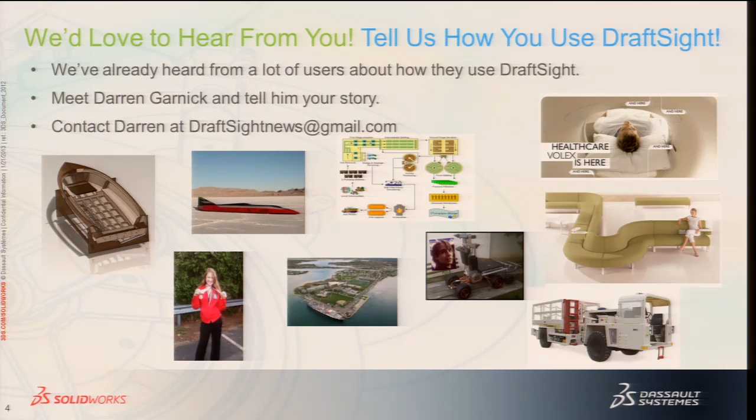We have a lot of great stories, and we like to keep them coming. Darren is here at SolidWorks World. If you feel like you want to go talk to him, he'll be in this session towards the end. When he walks in, I'll just kind of say, hey, that's Darren, and feel free to go up to him. Otherwise, he has an email address, draftsitenews@gmail.com. You can just send him an email and say, hey, look at what we just did with DraftSight. We've got some great stories already, but we'd love to get some more.

So today's agenda, I'm just going to go through some demonstrating with DraftSight. Hopefully you'll get some feel for what you can do with this system, what you can do with this product. I'll demonstrate these things, and I call them productivity boosters. So if you're using CAD and you want to customize your user environment, I'll show you how to do some of that.

Give you some of the things we've got going on with the toolbox. We've got this new add-in that we're going to offer. And I guess I'm free to say this now - it's not part of my presentation, but if you don't know, DraftSight, there's a free version of DraftSight.

You just go to draftsight.com. You can get it downloaded for free. It's available for the Mac, Linux, and also in Windows 64-bit and 32-bit. Just go download it for free.

We also have what we call the premium version. And the premium version is a paid-for version of DraftSight. With that, you get our telephone support, so you can call and get support. You get a network license, and you also get the use of DraftSight APIs, and you can run Lisp with DraftSight.

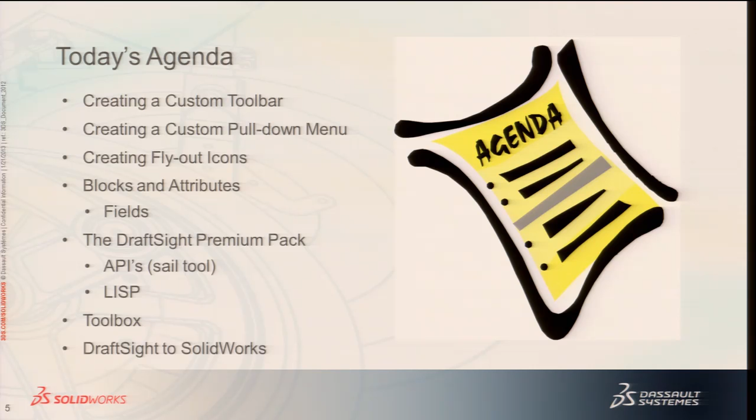Okay, let me just see if there's anything else on this slideshow. Be a CAD hero, we have a link here. Suzanne, this still works, right? We have a link here if you want to go back to your office.

Part of the reason why we offer this DraftSight is to try to get you to save some money on your CAD budget. If you use another CAD product, 2D CAD, DraftSight is DWG DXF native format. And if you're using 2D CAD in your office now and you're paying a premium price for that product, DraftSight is a good solution.

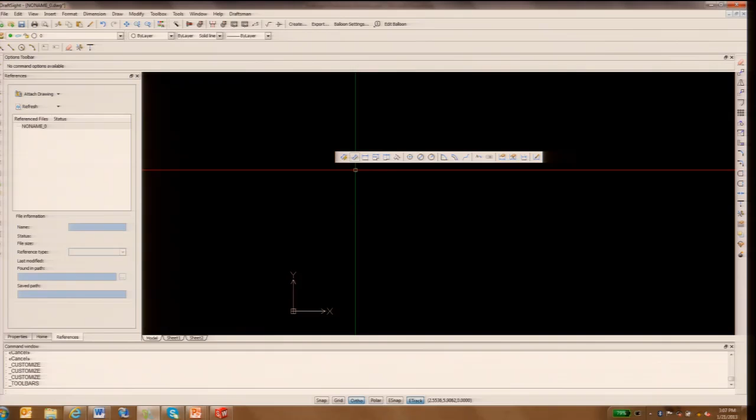Then I just go up to toolbars, and I look for the one that said draftsman. I click on OK, and where'd it go? It's right here. To dock a toolbar, you just grab it until you see the blue shaded area and just let go, and it snaps it in place. And then it snaps in place.

So I will get to that question real quick because it's pretty simple. A note, when you type in a note, you can type in a paragraph, okay? And when you set it, you set the distance for the width of the column. And as you type, it auto-wraps. You can have 5 or 6 rows of text all in one paragraph.

With a note command, what you do is you locate the note command, or the simple note command rather, you locate it, you type in your text, and as long as you type it, it's going to go. It doesn't auto-wrap, and it's one line of text. But if you hit an enter key, and you type in another line of text, and hit enter key, another line of text, when you place it, you end up placing 3 pieces of text on your drawing with the simple note command.

So that's toolbar. That is creating a custom toolbar, creating a custom menu. So what I did with the kids is shut off all the toolbars except for the one that I made, and I said, that's the only toolbar you can use to create your geometry.

And I, as a SkillsUSA advisor, trained one of the girls who had won the state championship in Massachusetts, won national gold. The reason why is because she actually had the 2D skills that she needed to be able to produce the drawing the way it should have been produced. These 3D tools are great. Automatic drawings are great. But unless they understand the concept of orthographic projection and know what they're doing, it doesn't make a lot of sense to them. So this girl got it.

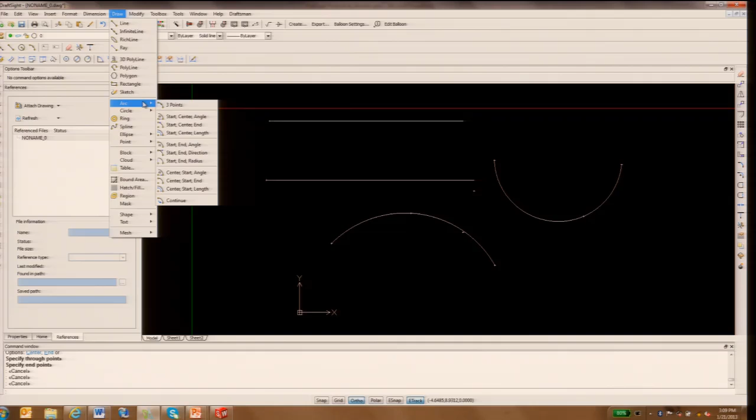So I go to draw, arc, and I have some more options. I'm going to say start, end, and radius. So I need to find one that says start, end, and radius. There we go. And I click the start point. Let me turn this on. I'll click the start point. I'll click the end point.

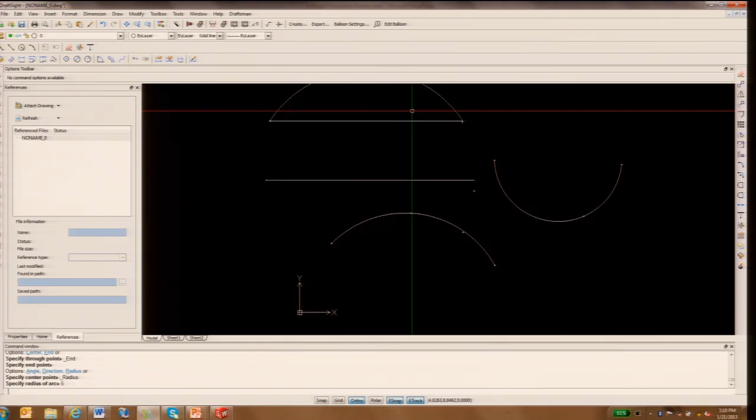And then a radius. I don't know what I can put for radius, so I'm going to put a number in and see what happens. There we go, right? So let me recycle that command. Hit enter, and I go start point, end point. And guess what? What happens is when you hit that enter key to recycle the command, it doesn't recycle it back to start-end-radius. It recycles it back to a 3-point arc.

And if you look at this icon, the only icon here is for 3-point arc. So if I wanted the start-end radius, it's not available. Really, the only place I can do it is the pull-down menu. So what I'm going to do is take this icon for arc and make a flyout icon, which gives me multiple options for the arc function, just like that draw pull-down menu did. Okay, so how do I do that?

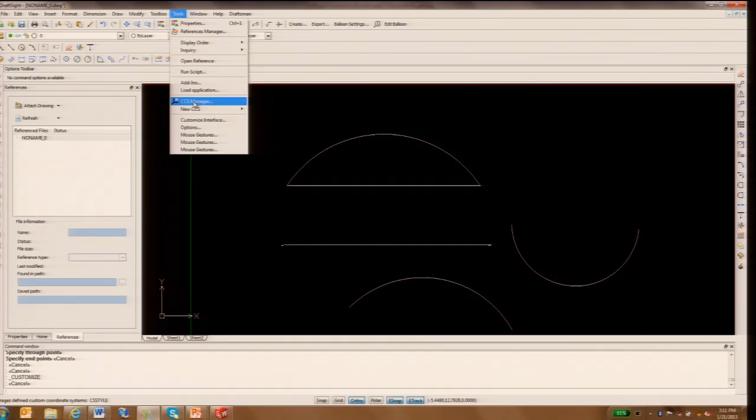I go back into my customize interface, I go into toolbars, I right mouse click. Actually, I'm going to expand the draw toolbar, because that's where the arc function is. And I'm going to come in here, right mouse click, and hit new flyout. So I click on new flyout, and it gives me that same thing - it gives me just a name, it says toolbar. So I'm going to right mouse click on this and rename it, and I'm going to rename it as arc. And then I'm going to take this one and actually drag it into that.

Now what I need to do is find some of these options. I'm not going to go through all of them - I just want to give you a good idea that you can do this. So then I got this one, here's an arc function too. So I come in here and look for my arc. Oop, what happened? Right there, drop it inside that little bin. Another one. Okay, so I've got a couple different ones. We'll call those four - just imagine that I did all of them.

So now I just click apply and click OK. And I have to admit this is a little bit of a poor display, because that icon for arc - I don't know if you can see it or not - but the icon for arc, which is right here, there's a little black dot right there. That's supposed to be a triangle. The little black dot indicates that icon is a flyout.

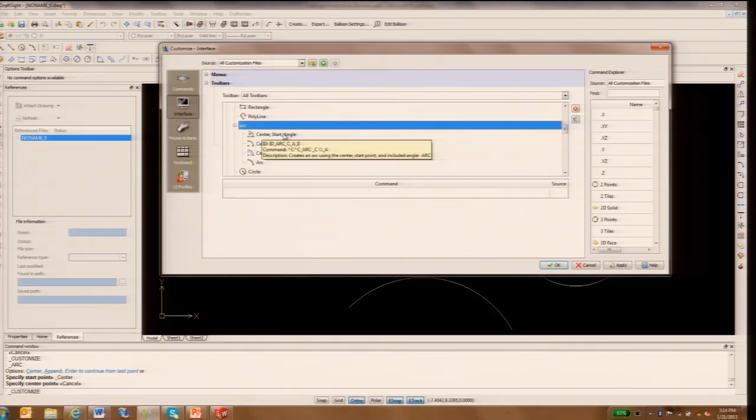So now I got myself a nice little productivity tool, and I'm off and running. And 9 times out of 10 when I have this arc, I reinstalled this product just so I could do this demonstration, but I usually leave that as a flyout icon. All right, I want to make sure that I don't. What time does this session end?

3:45? Okay. All right. I would like to discuss some blocks, fields, and attributes.

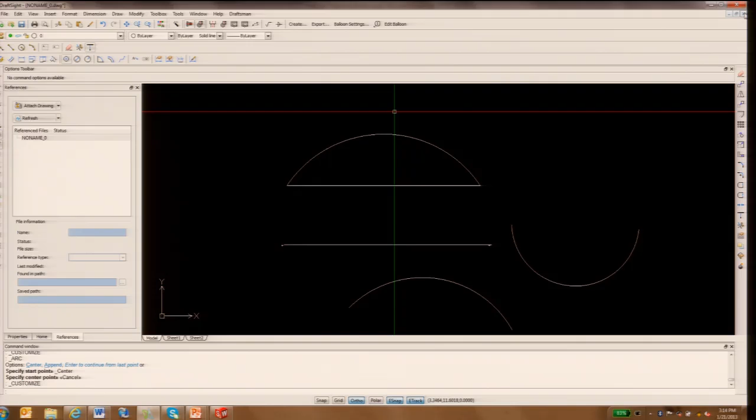So let me open a file. I can find it... And what I have is your typical drawing border. So with DraftSight, you can create blocks. You know what a block is, right? It's just a collection of entities all bound together to make one entity.

So what I'm going to do is take this. This is all separate entities, this drawing border, and I'm going to make a block out of it. And I'm going to add attribute data to it. And attribute data is intelligent text, right? So when I go to insert the block, it's going to ask me questions, and I'm going to be able to answer the questions. And then when I insert the block, it'll auto-populate the field. However, I'm going to do one little trick to the demonstration too.

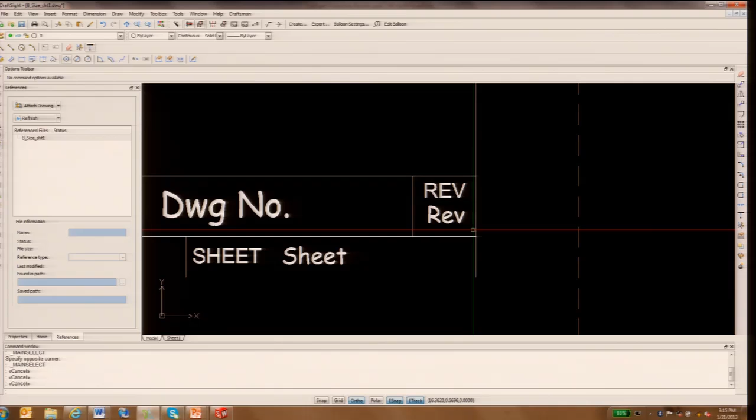I have an attribute called rev. I've already added most of the attribute data. I'm going to add one just to show you how to do it, but this way I don't have to waste your time by making you see me do all of them. I have one called rev. I'm also going to add a field text for revision, so I can try to give you an idea of what the difference is between field text and attribute text, okay? I think it's important to know the difference.

So let's do this. Let me just get rid of this drawing number, and I'm going to add another one for drawing number. So to add attribute text, you go to the draw pull-down menu, and you go to draw block. I should look on my computer here. Draw block and define block attribute.

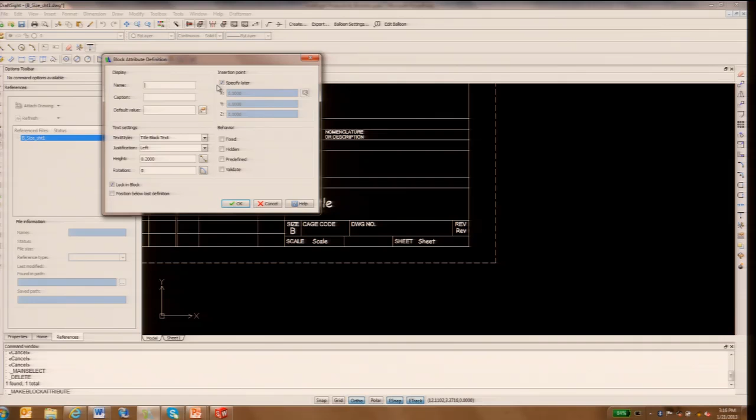And the dialog box pops up. And the first thing you do is you give the attribute a name. I'm going to give it as number. And then the caption is, what is DraftSight going to ask me when I insert this block? So when I insert the block, it's going to ask me something. So we'll just say drawing number. Default value is, if I don't fill in anything, do I want something there?

I always put something there because it makes it visual. I can see that there's something there. I can just click on it and change the attribute text on the fly. So I usually put like a little asterisk code. And here I could do some justification. I can use special text if I want, format it in a different way. Like I can justify this one. I'm going to put it in the middle. So let me come over here and I'll just say middle center.

All right? These ones here, fixed, just means the value is always fixed. Hidden is, I don't see the attribute, but it's still in the drawing. It has that intelligence. And if I happen to have a program that can extract the data from attributes into, say, an Excel spreadsheet, or we do have a command for exporting, I think it's block attribute export or block attribute output. You can send all the data to a text file.

So if I created, say, a floor plan of this room, and I made a block for every one of these chairs, I could say each one of these chairs was, I put a cost on it, say $50. And then I populated this room with all the chairs. And at the end of the day, I could say block attribute output, and it would give me the number of chairs and how much they're worth, so I can calculate a value for how many chairs I have. Think of that as an example of maybe an architect doing the same thing, populating a whole house. So you don't want to see that value on the block on the drawing, but you want the block to have that information. So you just do hidden.

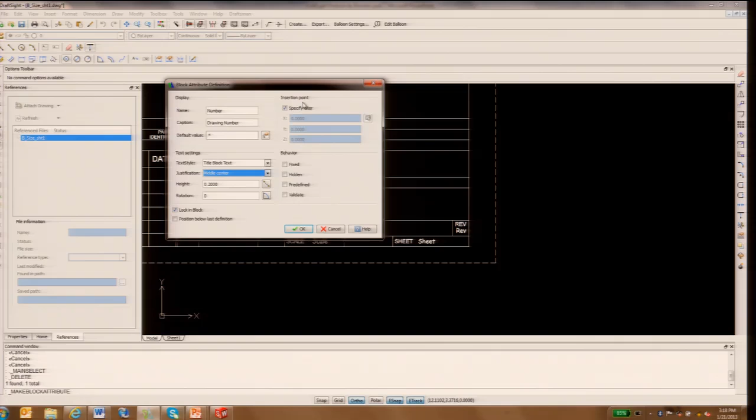Make sure you always click on this button here, specify later for the insertion point. Otherwise the block attribute text is going to go to 0, 0. So I just click OK, move it over here, put it in the box, and I've got it.

Okay, so let me do this now. I'm going to insert, well, I can't insert it yet. I'm going to create what we call a property, a drawing property.

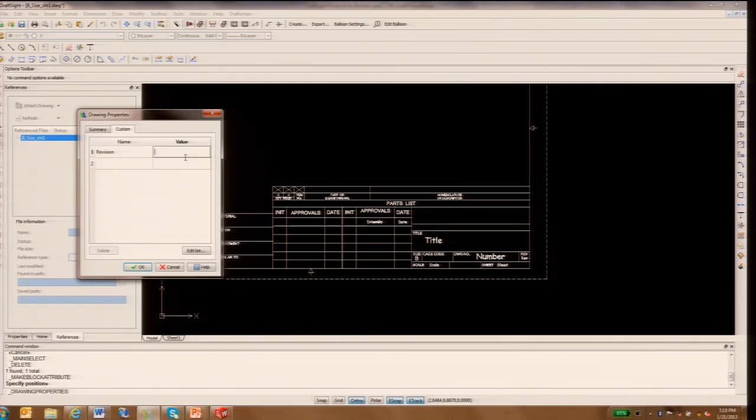So in DraftSight, you can go to File, Properties, and it gives you this dialog box for drawing properties. In the custom field area, I'm going to click on this down arrow and look for revision. Click on revision, and I'm actually going to give it a value of A. So revision A. I click on OK.

Then I'm going to insert field text for the revision. I go to revision, click OK, and place it right here. Whenever you place field text in your drawing, it shows up a little shaded, but when you print it, it doesn't print shaded, so you can visually see that there's field text there. I could have drawing number, my name, title, a whole bunch of different things I could put.

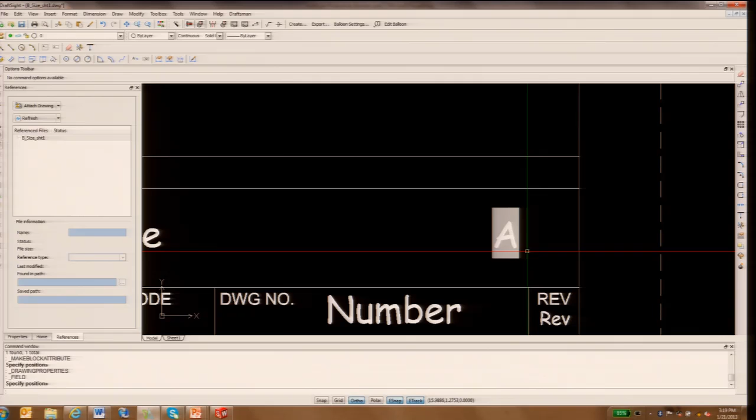You can create a custom field text, anything you need to put in your file. If you go to that drop down, File, Drawing Properties, I can click Edit List, and then add a new one right in here. I click OK, and if I come in here now, I can scroll until I find the one that says new one. So I created my own attribute, my own field text just there. Whatever you want, whatever you need.

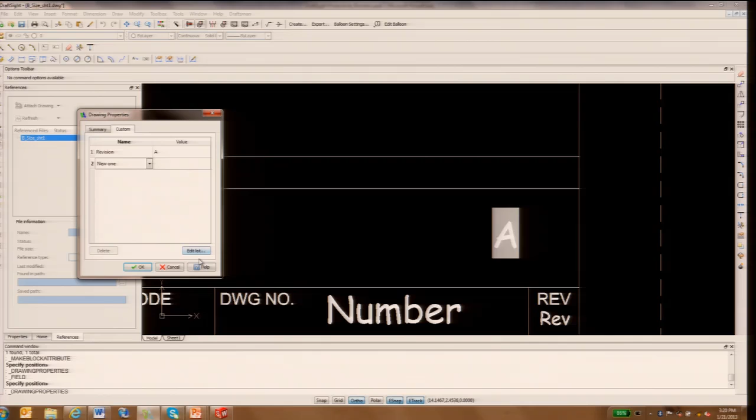So I input this, now I'm going to make a block out of this. To do that, I can click on the icon for Make Block. I'll give it a name, I'll just call it DWG. All right, base point - I always forget to click base point.

Then select the graphic area, select the geometry. So now I took all the geometry plus the text, right? I'm going to hit enter, and it's going to bring back the dialog. I have some options - I can preserve it as separate entities in the drawing.

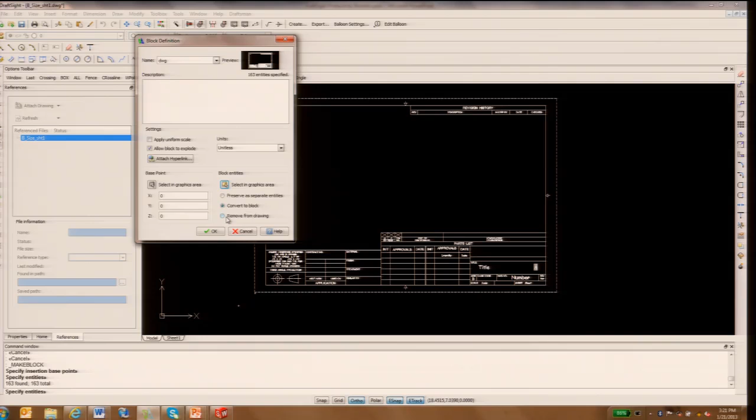I can convert it to a block, or I can remove it from the drawing. By clicking this, it's going to just disappear. But I have a block now in the memory of the drawing.

So let's insert it. I'm going to insert block, and DraftSight will default to the last block created. I'm going to insert it at 0, 0 with a scale of 1. Click OK, and it looks like it's in, but it really isn't. Because if you look down here...

It's asking me what the drawing title is. So now I can type in, I can fill in my fields. If I just want to hit my default value, I can hit default value for everything. And I notice that I didn't put in a revision.

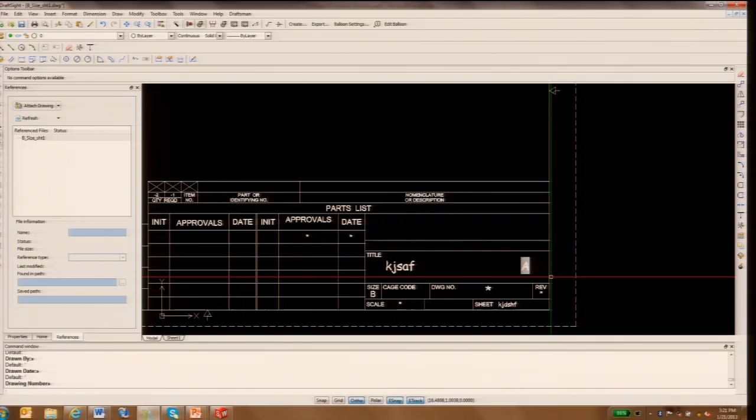One of the great things about DraftSight, when you have a block with attributes in it, is you have what's called double-click edit. I can just double-click this block, and it pops up my attribute value block. And I'm going to just type in the value for the revision, which is A.

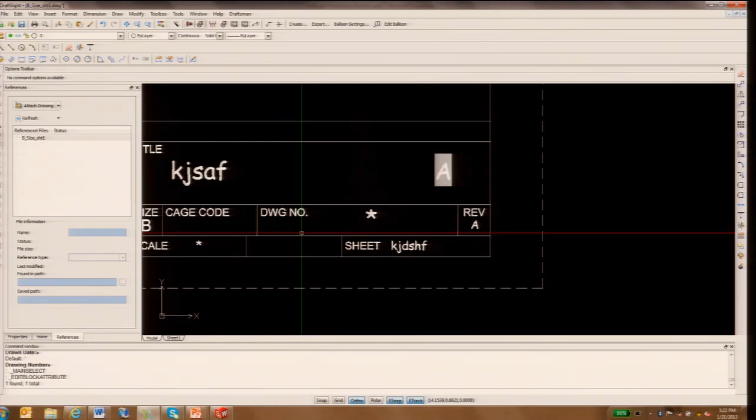So it's pretty simple, right? I'm going to go one step further and pretend I'm in a drawing environment. We've got to use our imagination hats on, because I know the first sheet would have the title block information like this, and a second sheet would have just the drawing number with the revision code. But I'm going to pretend I have a multi-sheet drawing, and I'm just going to use the same block.

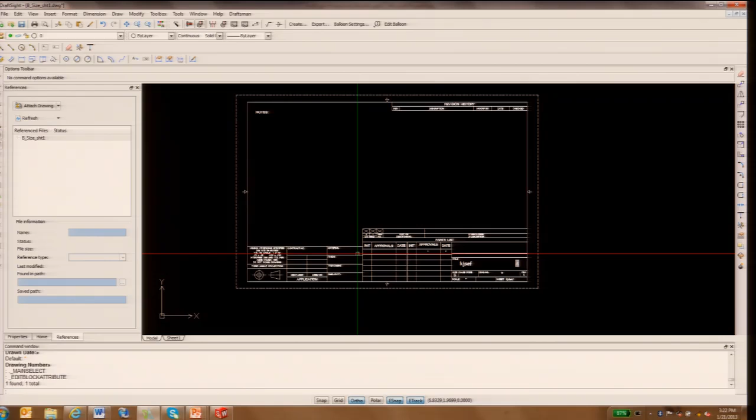So on my first sheet, I'm just going to insert the block. It looks like it's already there, but that's just a viewport. So I'm going to insert it here, insert the block. And don't worry if it gets bigger than the little graphic that I show on the screen here, it's okay.

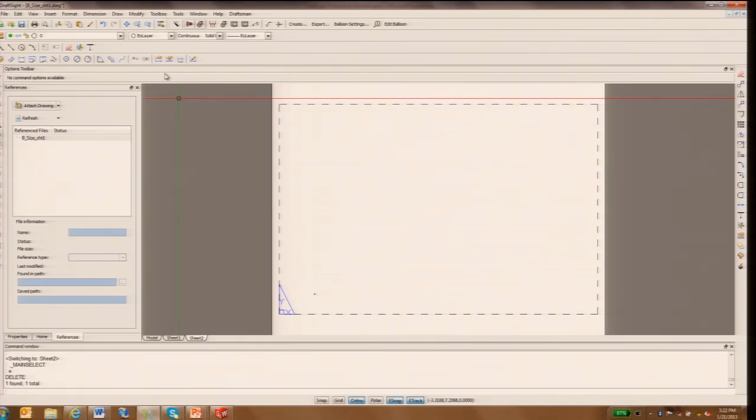Okay, I'm going to create another new sheet. Just right mouse click, click new, and it's going to give me another sheet. On this sheet, I'm going to get rid of the viewport, and I'm going to insert the block and put it in.

So now what you see is I have that same block in here. Oh, you know what? I didn't put it in either one of them, did I? Because I didn't fill in the fields, sorry about that. Insert block, click OK, put it in, and I got to fill in the fields. If you don't fill in the fields, which is something I always forget to do, you end up not getting the block.

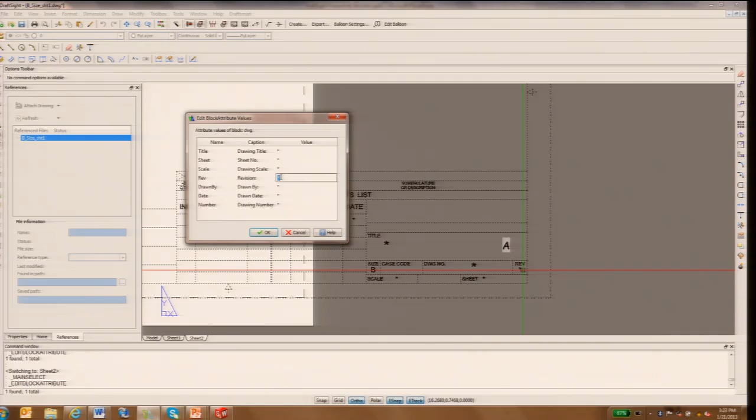So now I have a block in here. I'm going to double click on this. I'm going to change the revision code to A. Where is it? Revision A. Click OK. Go to my next sheet. I'm in here, double click. Revision A. Okay, all right.

So now the boss says, okay, hey, that drawing is great, Mark, but you know what, we got to make a change to it. So I have to go to the first sheet, I have to make a change. So I make a change. And what do I have to do to the revision code?

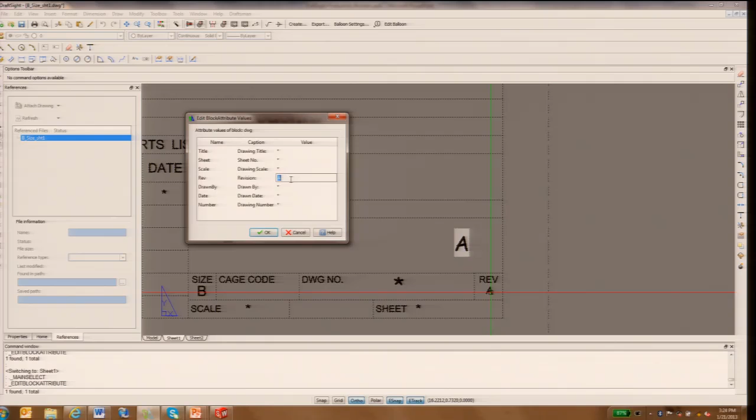Got to raise it one, right? So I come over to this attribute and I raise it one. That was easy, click OK. And then I go to the drawing properties, and you wouldn't do this, right? I'm just showing this in the example, the contrast between the attributes and the fields. So I come over to the field text and I make it B. So I click OK, nothing happens.

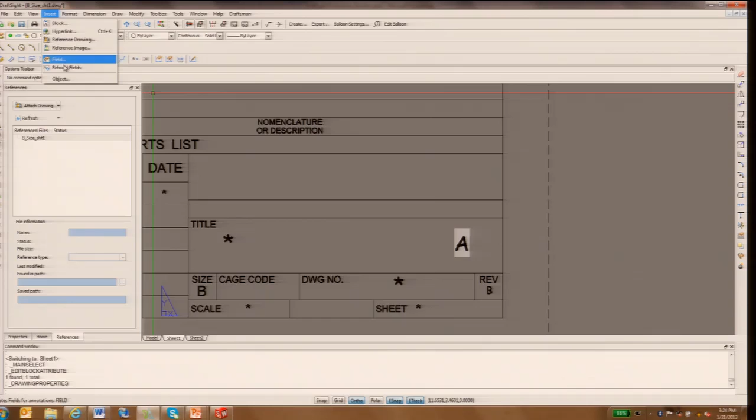There's two things you can do. You can go here and do an insert, rebuild fields, or if I save the file, I'm going to save this file. It ups the code, right?

Now this is sheet 1. What happens when I click on sheet 2? The field text will just update across the drawing because it's a drawing property. The attribute text would actually have to be changed separately. So if you're in an environment like this, you would probably want to put field text in, because if you have a 5 or 10 sheet drawing, you'd have to have the draftsman go in on every sheet and change the code to whatever. If you have it as a field text, as soon as you save the drawing, it updates, and you only have to do it once.

Question? Are the custom properties for the DraftSight file going to be really accessible through Windows, like a custom properties tab? No, they're not. The question was whether the custom properties are available through Windows. So if I go through Windows Explorer and hit the Properties tab and the menu pops up, I don't have those properties there. You have to go into the file to get them. That's a good question, and the only reason why I know the answer is because somebody asked me that question yesterday.

How are we doing on time here? Good.

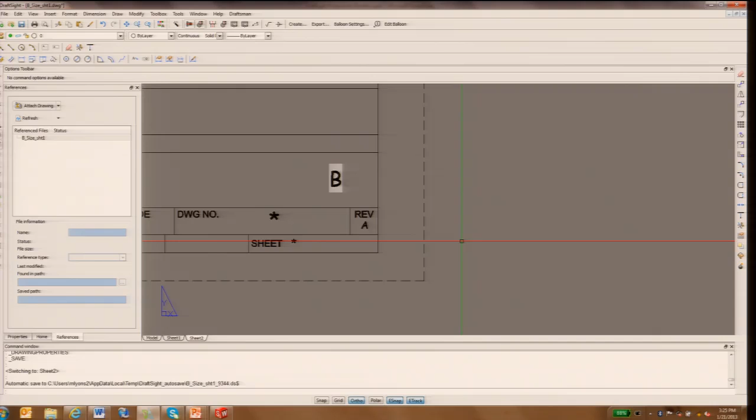Premium pack, am I good so far? No questions? More questions? Okay, so I do a lot of travel and a lot of customer visits and vendor visits, and I go all over the place. And one of the things that I find is that most people still view DraftSight as nothing more than a viewer or something they can open a DWG file with. If you were in the last session, you would have noticed Aaron Kelly had a slide, and of all the people who are using DraftSight, the majority are actually using it for new design.

Creating new design, and I get the look all the time. But you know who uses it for new design? The older engineers. You know why? They're comfortable with it, it's like home again. They know how to use it, it's what they wanted, that's what they got. They didn't want to move from the drawing board, but they got convinced to move from the drawing board, and they got convinced to go to 2D CAD. And once they went to 2D CAD, they're like, all right, I can see the use for this. And then somebody came over and said, hey, I got this great tool called SolidWorks.

And they went, I don't want anything to do with it. So a lot of the older engineers are doing layout work still in 2D. They pass it on to a hotshot designer, and the guy just whips it into 3D for them. But they're still creating design in 2D. A lot of people don't realize that DraftSight is a professional-grade 2D CAD product you can create with.

Yeah, we did renew our AutoCAD, but then finally the server crashed that had the licenses on it, and shared licenses, so now we're using this. That's one of my goals, is to find out. Once we get all this set up, I assume we can save this as a template for all of them. Absolutely. Get everything all set up, and then we can have something somewhat familiar.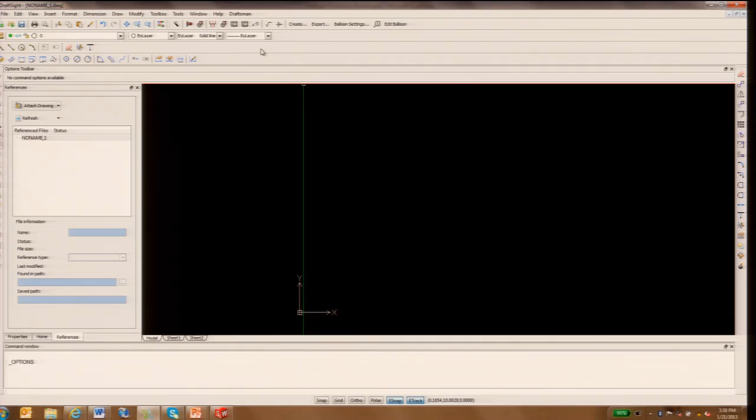So I'm going to show you a quick app we created. It's called Sail Design. Just going to load it in. Even have a little icon for it. I can't seem to grab it. There we go. And I'm going to launch it.

Bear with me for a second because I've got to find the spreadsheet. It might be right here. So here's the spreadsheet, so I just open it. You see it, all the data's in there. So I click open. And then another menu comes up, and it says, well, that spreadsheet has all these different sizes on it—which size do you want me to draw? Well, let's do this, let's check all—I want every one of them. It's drawing 9 different sized sails right now.

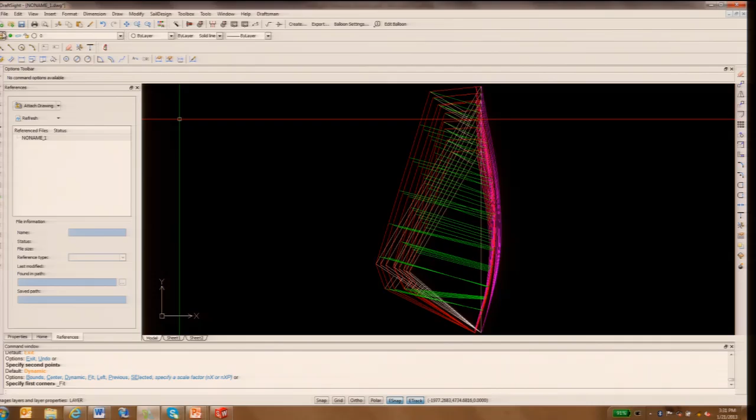So remember, it took this guy 2 weeks to get these drawings to turn around. And there you go, there's a document now with all the different size sails. Now, if I open up this layer manager, you can see it's created all these layers with different sizes on it. So let's say I just want to see the size for 4.3. I just come in here, I do Shift Select, I can freeze all my layers, and there's that one sail, one size.

That's pretty cool. That's DraftSight Premium with the API, DraftSight app API. Saved them a ton of money.

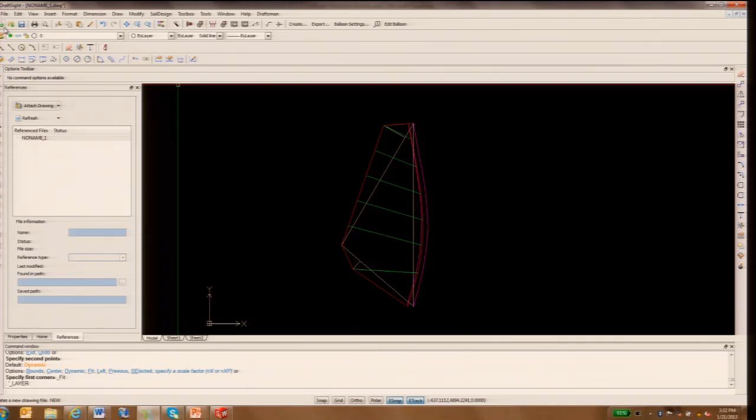Okay, so currently we're in development of a new add-in that will be available to anyone who purchases the premium or the professional version. This add-in is called Toolbox. I have a copy of Toolbox here, it is still in beta, actually it's still not even in beta, it's still in the development process. So please bear with me that some of this stuff is not quite ready for prime time, but I did want to show it because I'm excited about it. So let's say I have to create a design.

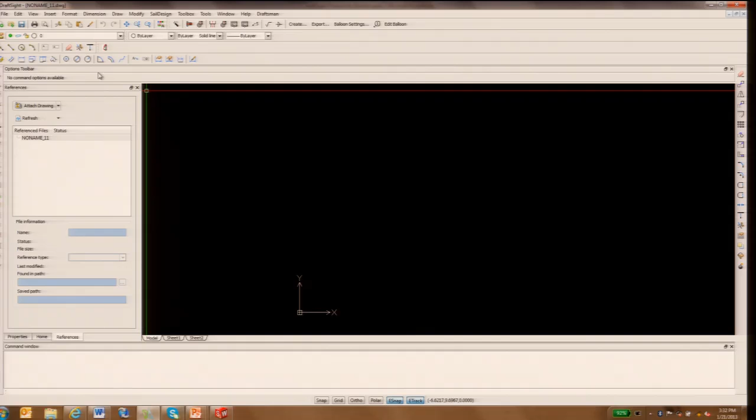We're going to use our imagination hats that I am the greatest designer in the world, and I'm making the most complicated design on earth, okay? And right there, I just made a really complicated design, and I've got to add some hardware to it. So we're going to say I need to put a 1/4 bolt on this thing.

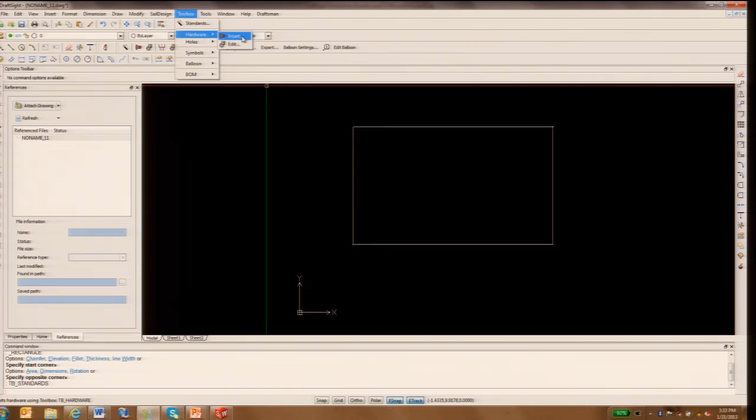So I just go to my toolbox. There's a toolbar for it, but I'm going to go to the pull down, the toolbox. I can check the different standards, right? So I'm going to use the ANSI inch US standard, and I'm going to go into my toolbox, go to hardware, and say insert. So I'm going to navigate through here, and I'm going to say I want a bolt. Hex bolt, 1/4, that'll be all right. It should be fine. It gives me some information here too.

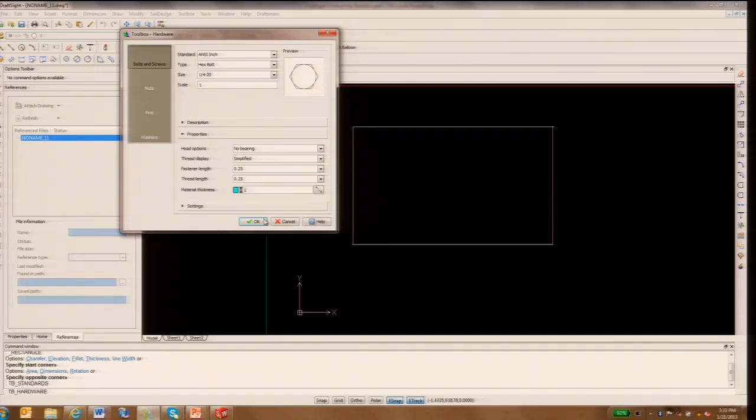If I wanted to change my layer that I'm going to put it on, or if I wanted to create a new layer to put it on, whatever, I could do that at this point. So it gives you some different settings and properties that you can use. But I'm just going to say OK, and insert it. And I'm going to insert another one, and another one, and another one. I probably shouldn't have put them so close because I don't know how big the hole is going to be that I'm going to put in there. Okay, so now I'm good, so I hit Enter or Escape, and I'm out.

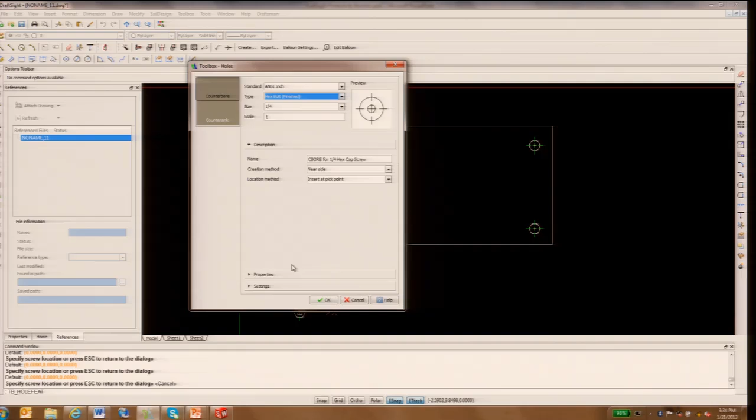So now I'm going to put the hole in for it. I go to Toolbox, and go to Holes, and I'm going to say Insert. So I'm going to insert a hole, and the hole is going to be for a 1/4 bolt, counterbore, so the bolt's going to go into the hole a little bit. Again, you get the same properties and settings that you can put in. So I click OK, and then I need to place it, and hopefully I can get this placed.

Forgive me if I don't get them in the right spot, we're just pretending here. I would be clicking the intersection point, but I've got too many points set up. So now we've got the holes, right? So I just created this design and put the holes.

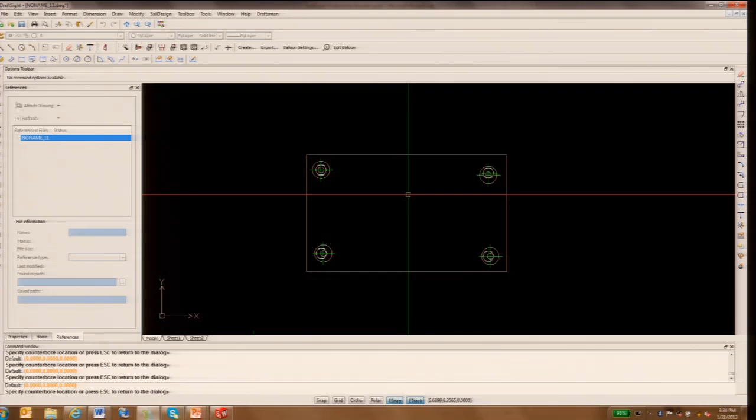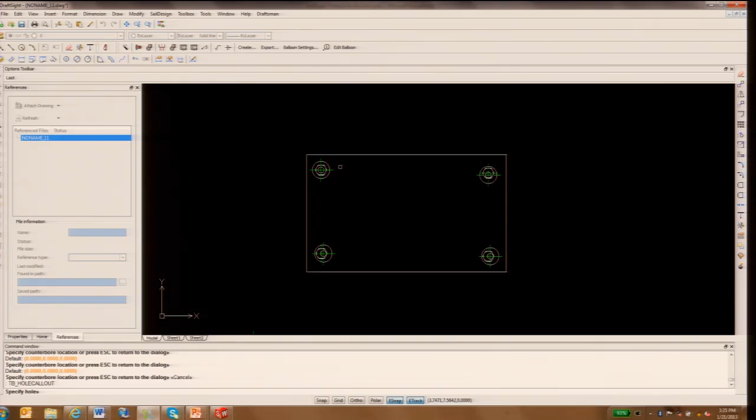So maybe I need to detail it, right? I need to put a call out for this hole. So I can go into my hole call out, and I'm going to use a symbol type of call out. I click symbols, and click OK. It says to specify the hole, so I click on this hole here. Now it wants to specify the start point.

Again, I would get a little more detailed right now, but I'm just going to do this really quick. So I click here, click here, and then click here. I hit Enter, and it gives me the hole call out information. Again, it's not ready for prime time yet, and I'm going to go through this. I know there's some standards that are maybe a little different, and I think the thing that says 4 holes should be 4x. Okay, but I know that, and that's going to be fixed. So I just was able to do that, saved me some time, right?

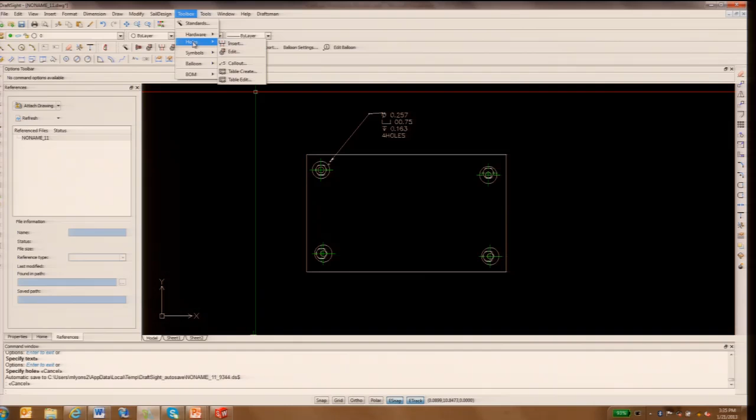And then let's say now we're going to pretend this is a printed circuit board where they use a hole chart to find the location of the holes. So let's go in here, go to the toolbox, and we are going to create a hole table. I'm going to use a long table, and you'll have the ability to customize the look of the table too at some point. So you're going to put the table there. Now it says specify the origin, so where would be the 0, 0 if I was going to do that? I'm going to click right here.

And then now it says specify the holes, so the table. So I'm going to click. I just grabbed everything. It's only going to read the holes, and I hit enter, and it builds my hole chart.

So this is an app that we're creating, and it's actually being built with the DraftSight API. So if you have a really hotshot programmer at your company, he could do the same thing. There's nothing in the core that we're adding that will make this happen. It's all built on top of the DraftSight API. So that's available to you with the premium or the professional version.

Okay, how am I doing? Okay. Toolbox, DraftSight. Okay, good. I hope SolidWorks is up and running.

It is good. So I'm going to do one more little demonstration for you. And this is like my little gift to the SolidWorks people because they like to see SolidWorks. I want to see SolidWorks. Show me SolidWorks. I'm going to open a file.

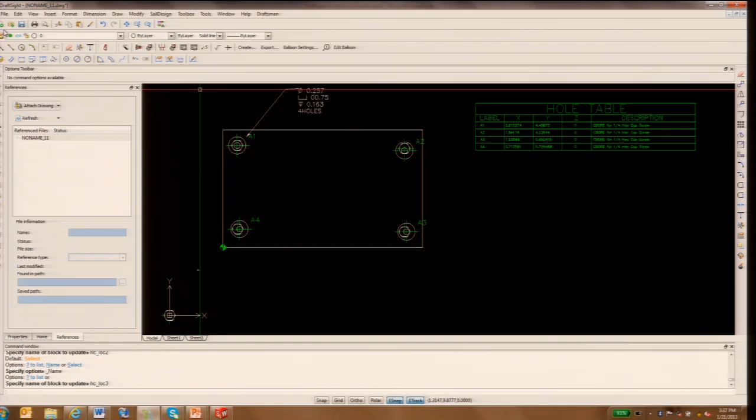Let's say this file, this is an old legacy drawing file that you have in your vault, and the boss says to you, hey, look, this design is really valid. We want to use the same mechanism. We did this in 1995, and we used 2D CAD to design this thing, and we're going to use the same mechanism. And we want that mechanism, but we want to do design in SolidWorks today. So you call up the drawing, and okay, great.

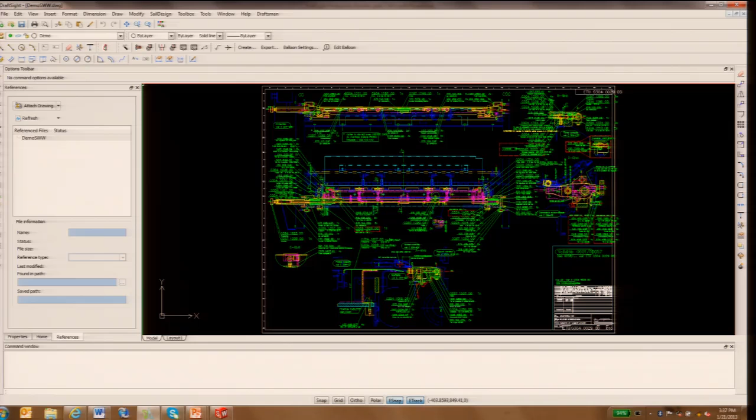One of the things you can do with DraftSight is you can take geometry from the file, and you can export that geometry as a block or into another file. It creates another DWG file, let's say. Okay, so I'm going to come over here and I'm going to look at this, and I see this outline for this lever. I'm going to just click on it for a second. And it's all one polyline, so it's pretty good.

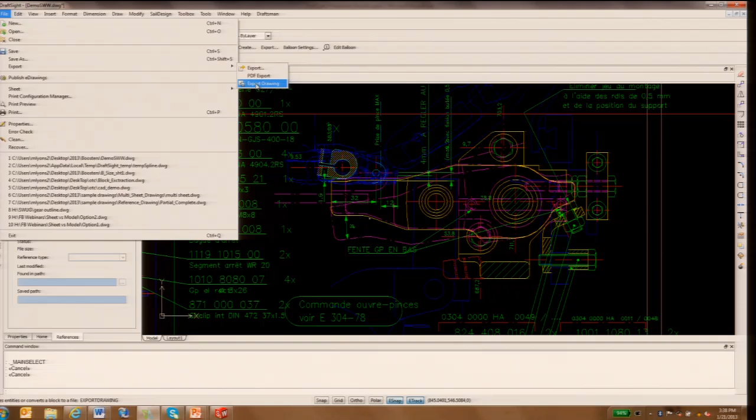So what I'm going to do is I'm going to go to File, Export, Export Drawing. And I'm going to select the entity right there. Hit Enter. Let me specify a base point. And I'm going to pick the circle, say right there. And then what I need to do is I need to actually give it a path. I need to tell it where it's going. And I like to force it to where it's going to go. So I'm going to create a path, and I'll put that one in here.

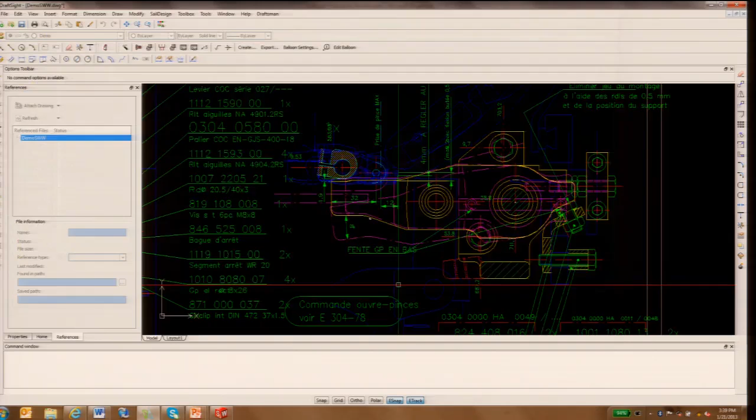And we're going to call it SWW, SolidWorks World. And then I click OK. And just to show you what happened is I will now open a file that I just created called SWW, SolidWorks World. It's just the outline. I could have grabbed as much geometry as I wanted and exported it to this, and it would make a new drawing for it.

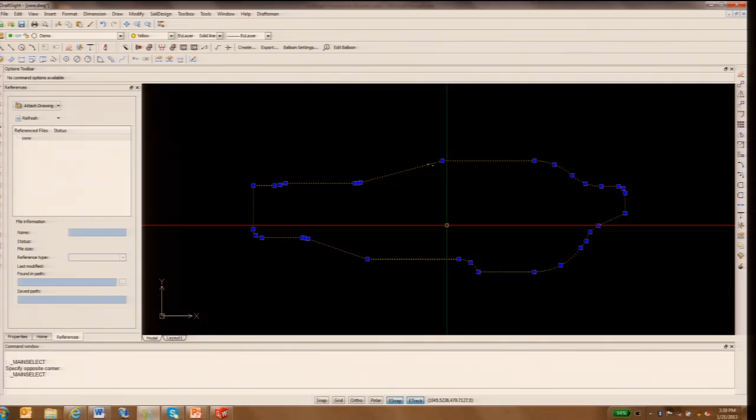So this now, what I can do, and it probably could have done this in a different way. What I'm going to do is I'm going to select it, and I'm going to just hit Control-C, copy to a clipboard. I'm going to open up SolidWorks, and I'm going to create a new file.

And then I'm going to create a sketch on a sketch plane. And I'm just going to hit Control-V for paste. And if I do a fit screen, you see I just pasted that geometry right into SolidWorks. Right? I did that wrong. Okay, so that's one way to do it.

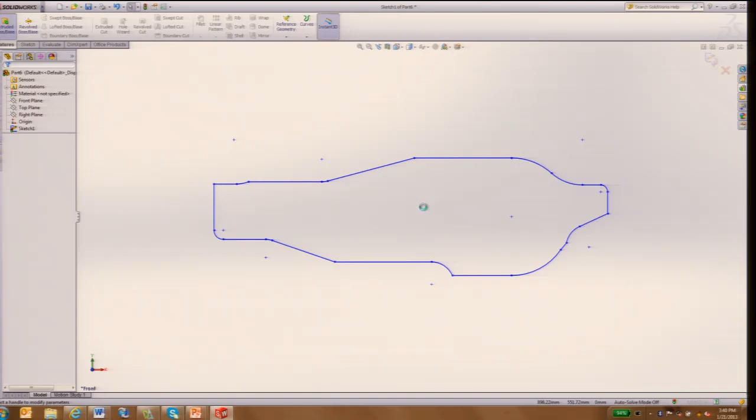That's one way to do it. And then I could do this. I could say features extrude. And I can just click OK, and I got my model. So that is one way to do it.

But I'm going to show you another way. I'm going to create another new file. And instead of copy-paste, what I'm going to do is, you know how I extracted that geometry and put it in a new DWG file? Now I'm going to go up here, and I'm going to Tools, and I'm going to Blocks, Insert.

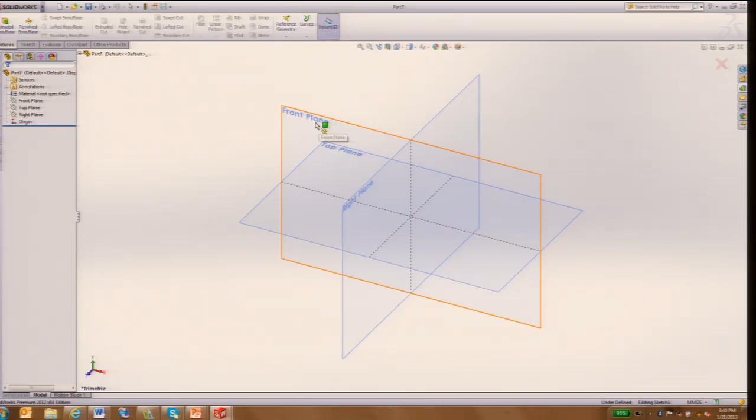Okay, I'll click the front plane, and I'm going to browse. I'm going to browse for that file that I just created as a DWG, and you'll see it's right here called SWW.

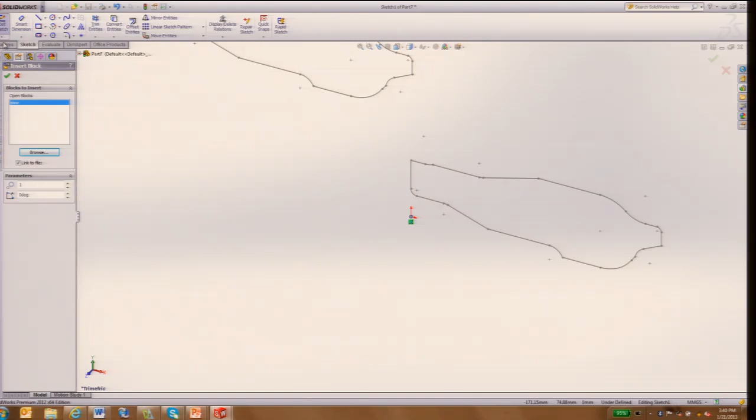Before I click open, I'm going to hit this button right here, create external reference to file. Click on that, click on open, place it, and now I can extrude it, check, and I've got a model.

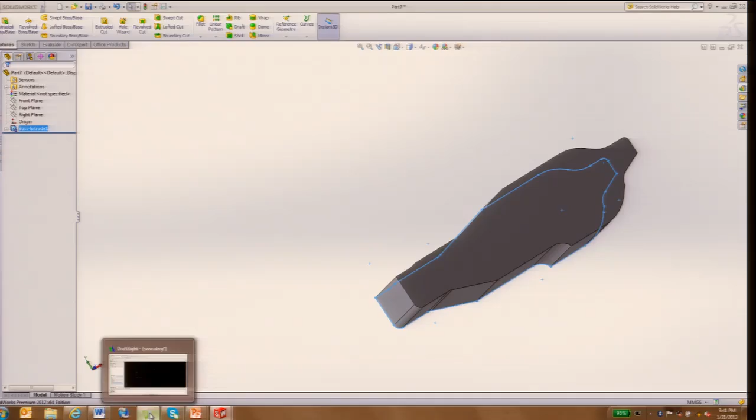So I'm all proud of myself, I go to the boss and say look what I did. And he said, that's great, Mark, but you forgot to put the hole in the middle of it. So I go back to Draftsight, and say okay, I forgot to put the hole in the middle. So I'm going to go to circle and create a hole. We're just going to pretend I located this hole in the most perfect location.

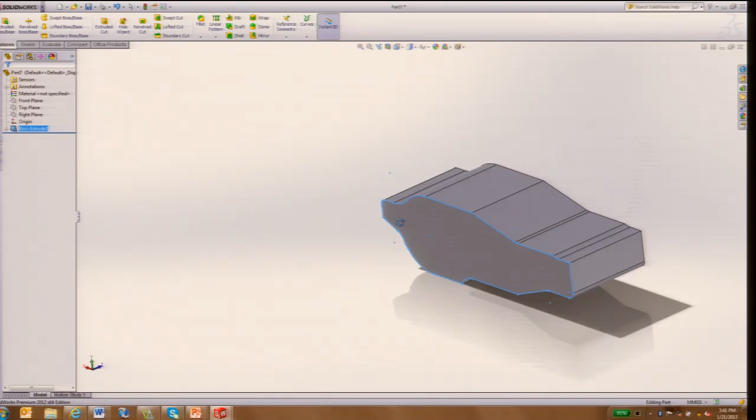And I'm going to save the file. I go back to SolidWorks, and I've got to make sure I know which one I just did. I think it's this one. And then I can simply hit Control Q. And it adds a hole.

So a little bit of connection between the two products, if you so be it. Either way, if you have a DWG legacy file and want to create a model, you can just copy paste to a clipboard and put it in a sketch plane, and create your models that way. Once you put the geometry in the sketch plane, you need to fully define it. It doesn't come with dimensions, but it is scaled. You just need to add the dimensions. You can auto-dimension it, and boom, you're up and running. You're good to go. So that's what I have for you here.

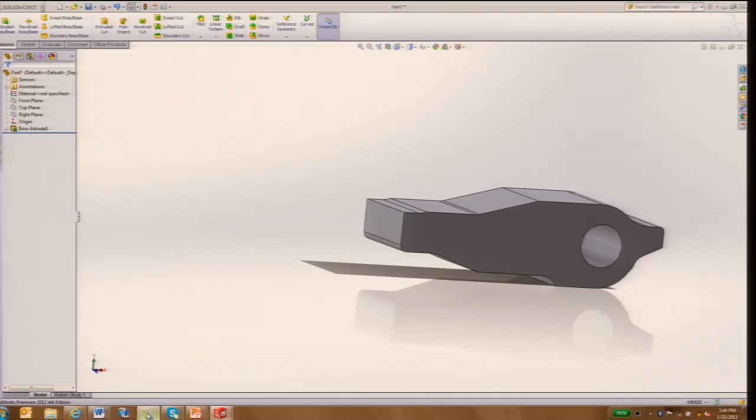Yes, there's templates. If you go into the API help in Draftsight, the question is there's templates you can use when you create an API. If you go here and go to API help, you can find some templates in there that you can use to create your own add-in.

Thank you, oh one more question. Are you asking if you can do the opposite of what I did? No, you can't. The only way you can have that functionality that's associative right now is if you go from Draftsight to SolidWorks. You can't take a SolidWorks file and make it associative to Draftsight. It may be functionality we add at some point, but right now we don't have it.